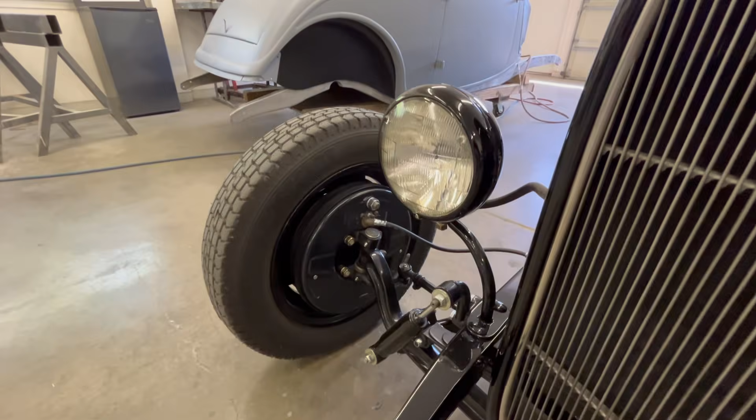And of course the shock absorbers are late model shocks, but the brakes on this car are Lincoln, they're Lincoln Repop by Bowling Brothers. That's front and rear? Yes, all four of them.

You'll notice it's got just a single mount up here, and you have to adjust them at the bottom with the spoon. Remember that? Yeah, you take the rubber out. I got a couple old Volkswagens that use that same method with the little star adjuster, little star wheel in there. Yep, a couple clicks this way, a couple clicks that way, and so she'll stop.

The spindles are 1940.

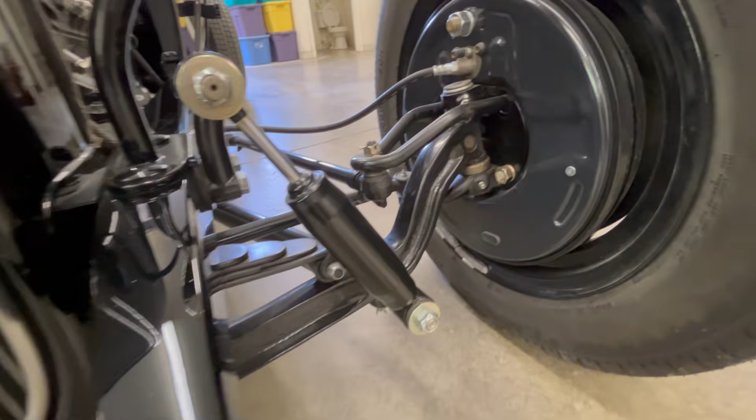The steering arm is an aftermarket steering arm that I dropped. He did drop it a little bit, so the pitman arm is level with the drag link level with the pitman arm down there.

The wishbones are 32, and steering is F1, 1950 Ford pickup.

The engine is a 1947 Ford. That might be 48, I had a 47 block, but I don't think that was good, so that might be a 48 block. Doesn't matter, same thing. All built by Archie Summers.

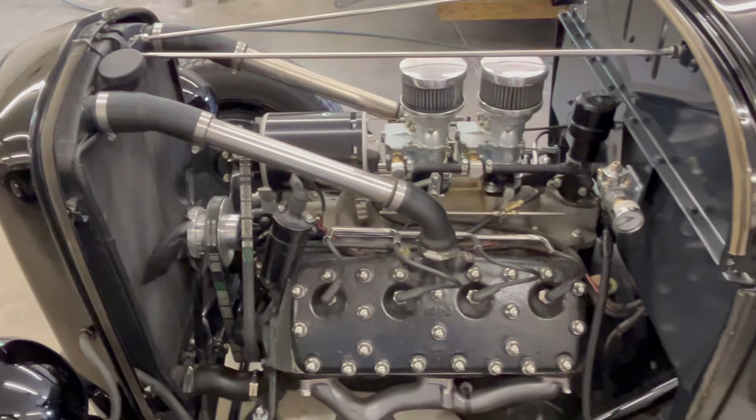And it's not a real generator, there's an alternator inside the generator.

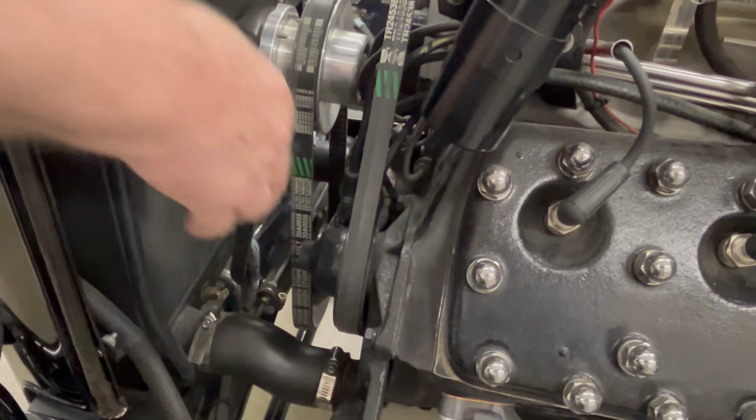Ignition, the distributor is a 42 Ford, that's the short one for clearance in here, you got to have the short one. So that's what that is. Yep, pretty tight squeeze in there. Yeah, it gets pretty close.

The radiator is from Brass Works down in Paso Robles.

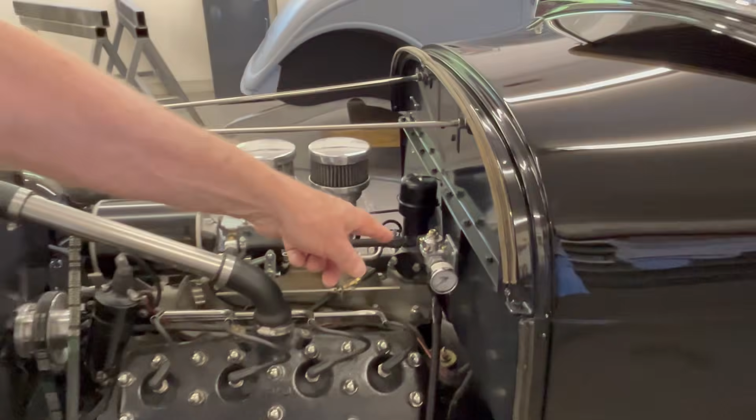And that's a warmed up flathead, Don? Yeah, it's about 130 horse, 85 horse stock, you know. It's beautiful, got dual carbs, dual 97s on it with an offie manifold, and your fuel pressure regulator right there. That runs at about 2.5 pounds of pressure, you see that when it's running, it's about 2.5 pounds, which is right for that.

Beautiful, and this is that traditional look in the engine bay. It's not red, it's not a finned head, polished. There's a lot of different styles that people use when they do a traditional hot rod build.

Right, sometimes it's a lot of eyeball with a partial hood. This really reminds me of kind of a high schooler that's on a budget, building a car in his folks' garage or driveway. The whole theme of this car was to build one like a guy who just got out of the service, Second World War, on a limited budget.

Yep, in like 1949. You could buy a frame for $5 and a body for $10, and all that. So that was the theme of the car: authentic, early California hot rod.

Now the cowl, I found it doesn't matter where, but I found this cowl is absolutely mint. It was mint, and it came with the windshield post and windshield frame. I've laid the windshield back and all that stuff, but the cowl was just primo deluxe, no rust, nothing like that. Wow, that's a nice find.

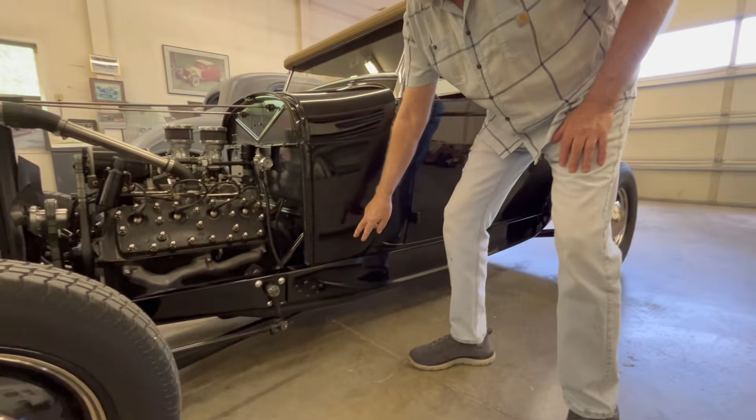And the frame is slightly pinched in this area here because they tend to be a little bit too wide, so it's pinched a bit to fit the body. And that's to accommodate the shape of the 29 body that gets installed in a 32 frame.

And is the frame reinforced? Yeah, I want to show you that. I have a thing I'm going to give you and show you where I reinforce it. I have a schematic of a 32 frame, and I drew in there with a magic marker what I did, so you'll know when you're under there, you can see it.

And the hot rod for dummies pitch I gave you is actually partially true. Is this a chopped and channeled? No, not chopped and channeled, it's chopped a little bit, the windshield. If I remember right, the windshield's down about 2.5 inches or so, I don't remember exactly.

It's not channeled because the body's sitting on top of the frame. And if it was channeled, you'd see the frame rail tucked, the body would be over the frame. That's a completely different look. Now, you don't want to do that on a 32 frame because the frames are like 6 inches tall. If you channel it, you don't have any room inside.

So this way you get maximum room inside, which once you get in there, you'll appreciate. It's a little on the tight side getting in and out. And Don, what about the trunk? Can we pop the trunk?

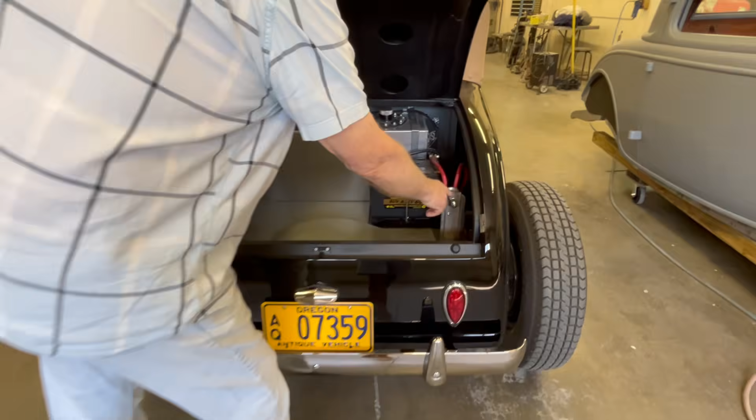I know you've got a battery cutoff in the trunk. Battery cutoff's right here, it's off right now. So that leaves power to, left position's off, right position's on. And there's an aftermarket fuel tank.

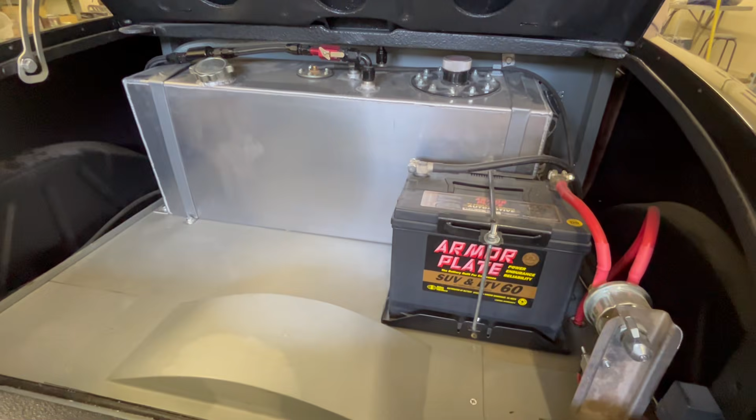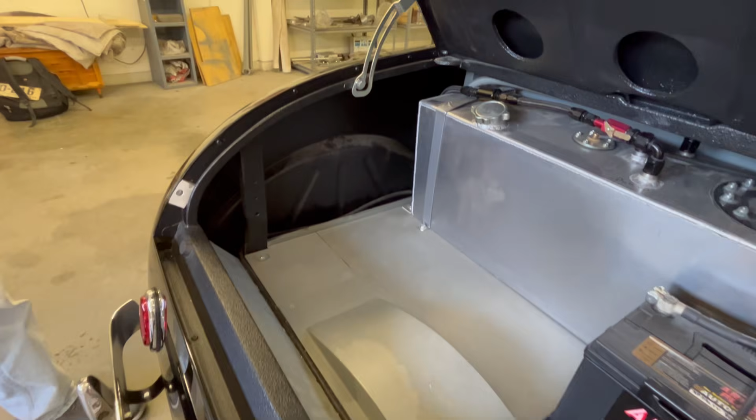It just looks so clean, and every detail is usual stuff. I didn't finish it all off with carpet or anything like that, because they wouldn't have done that back then, sticking to that theme of 1949, 1950. I mean, I could have taken it all the way, had all the upholstery, but what for? They didn't do it back then, guys did not have a whole lot of money, and the only reason they build a good car is because you buy stuff so cheap.

Now the taillights are 39 Ford, they're LEDs. And the bumper is... why can I remember that... not a Morris Minor, but the other little car, you could buy it out of Sears Roebuck. It's true, really.

Yeah, they sold them in Sears Roebuck catalogs. So I'm picturing kind of a micro car or a mini. It was a small car, I can never remember the name of it. Anyway, that's the front bumper off of one.

Oh okay, it's been re-chromed. Yeah, it required a lot of work. It was not a good thing, but I mounted that back there and all that. Oh, the body and paint is just beautiful.

Now the passenger cell has been moved 2 inches to the rear. This part right here used to be 2 inches forward. I shortened up this upper deck panel, moved this back, so you got more room. So this back was 2 inches more forward originally. By virtue of moving it this way 2 inches, now your seat and interior cabin space has gotten a little bit more spacious. That's the passenger cell, and it's got more room now.

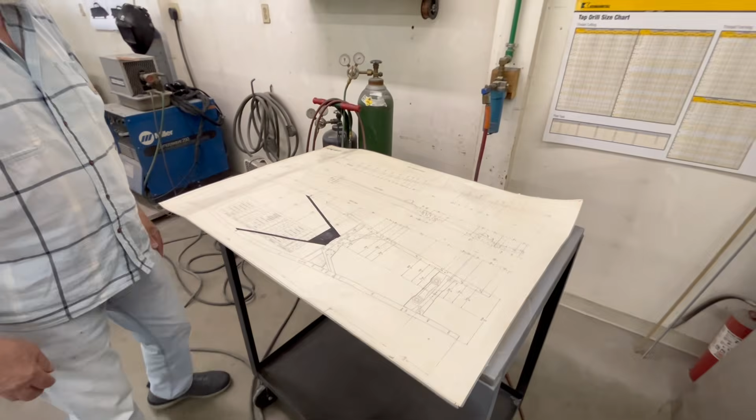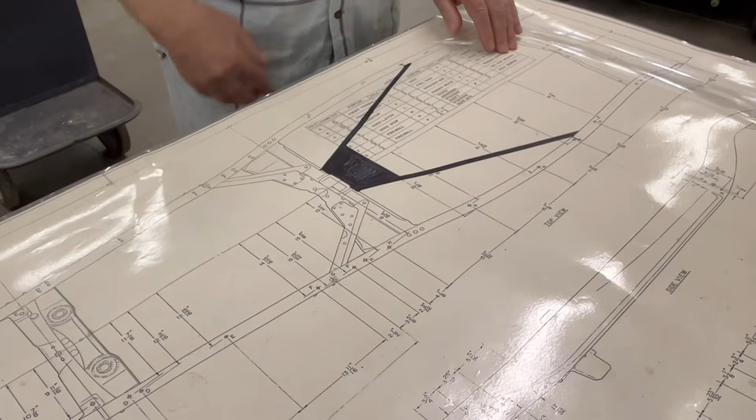Let me show you the frame thing on the schematic I have. '32, the frame that sits underneath that car, with a Model A front cross member and a Model A rear cross member. But the K member is original '32, but it's been narrowed a little bit because they had to pinch the frame rails to follow the '29 body a little bit. That's the pinch we talked about when we were filming the car.

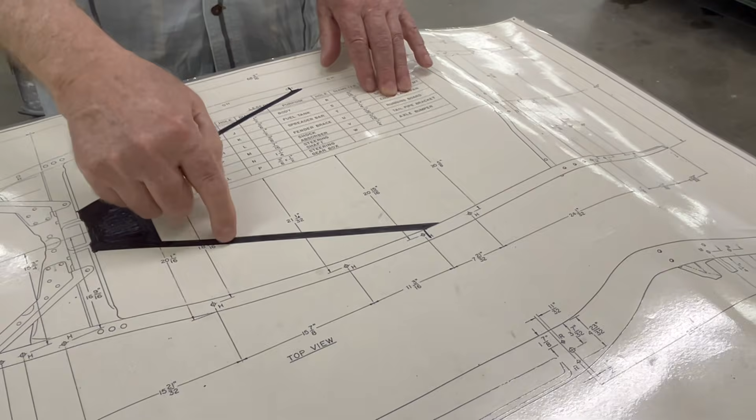The black part here is what I added to it because these things flex a lot, okay? So these right here are a 2x5, 3-sided channel out of a '47 Ford, and it's got the holes in it for the exhaust to run through and all that stuff. So I used those, then I welded them to the back of the K member down into the frame rail back here. And then I added this heavy quarter-inch plate up in here, across this area, just bolted in.

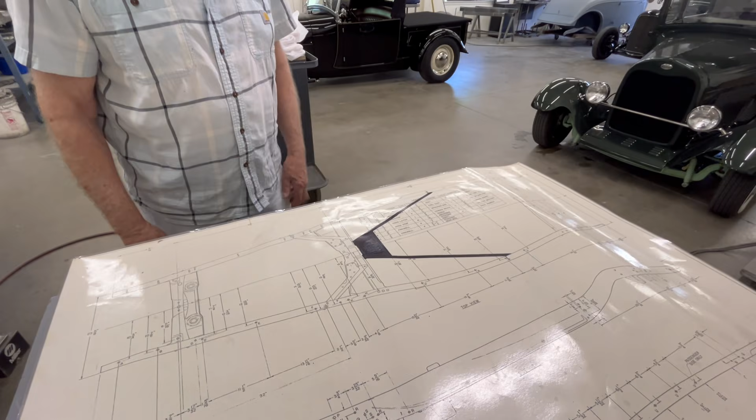That's to keep everything from flexing, to minimize the flex, okay? And you'll see, when you get under there, you'll see that. So I drew that in for you so you would know what that was all about. So that's how you properly put the right frame together, solid, well thought through.

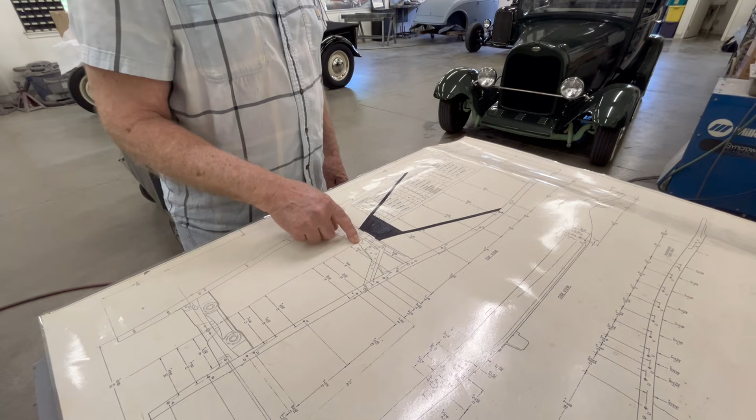Old-timey, okay? Now what they do today with the repop frames is they've got all this tubular stuff going on, all tubular cross members, side to side and this and that, set up for Chevrolet motors and stuff like that. If you're gonna run a flathead, you gotta run the original K member, because the transmission - you could see the K member, it's like this high with a hole.

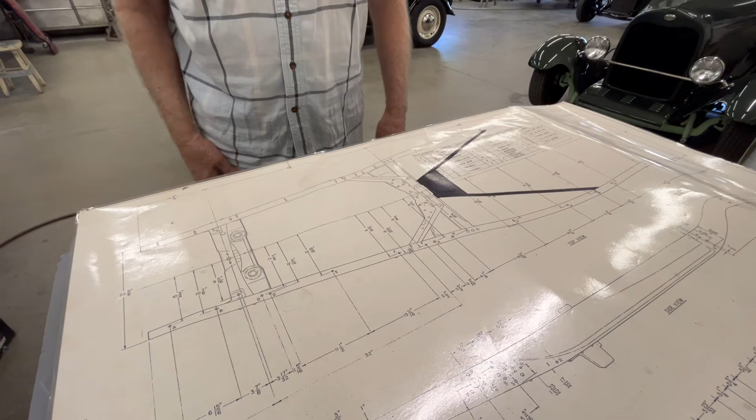The transmission goes through there, mounts in here, and sticks out the back and connects to the torque tube. So that's an enclosed drivetrain, enclosed with a drive shaft inside the torque tube, you know, like old Ford. And like I say, these sections here were about a 2x5 or so, with the flared holes for the exhaust to run through. You'll see all that when you get in there.

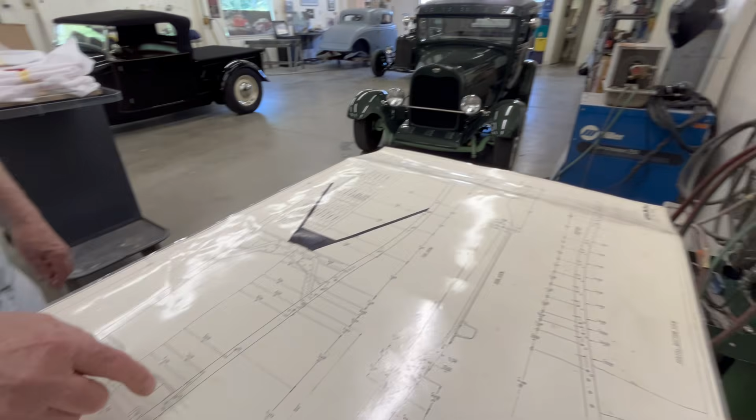Motor mounts are handmade. I made those up. There you have it, that's about the extent of the frame situation.

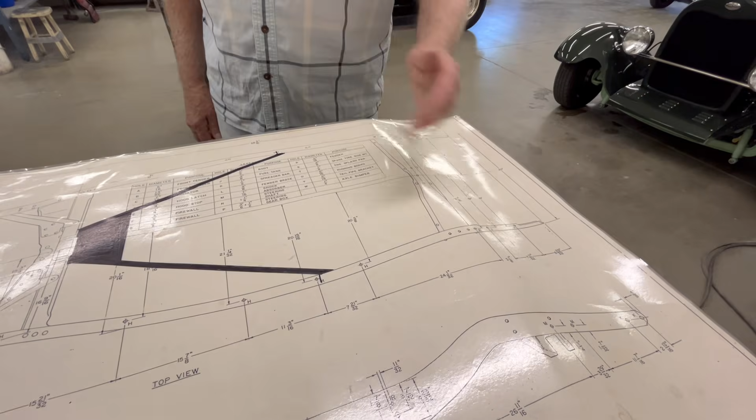Of course, the frame horns are cut off. The rear frame horns are cut off, right about in here somewhere, and you don't need those. The body only comes to here, that's where the body ends. Yeah, the '32s had the gas tank off the back, remember? The gas tank hangs out here, so they had the long horns on. So you trim it to fit.

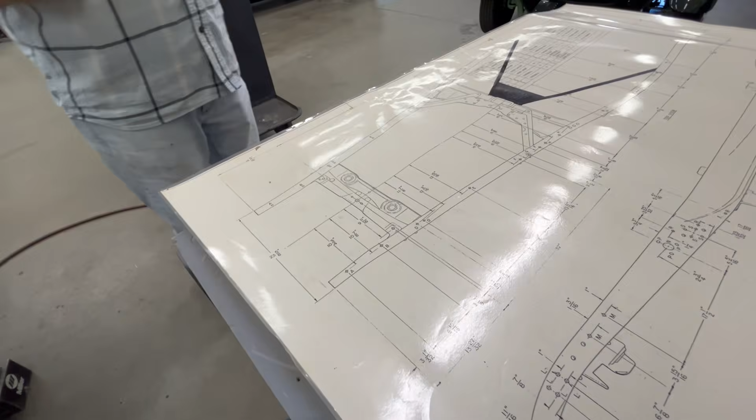Yeah, exactly. I left the front - I didn't cut the front frame horns, I left those on there. Like I said, I just did what was typical hot rod build after the war. And that's it, a good street driver, you know. That's what that was all about.

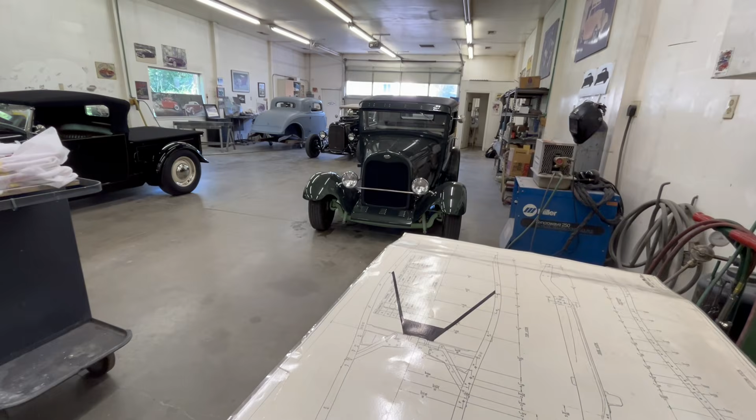I think it was 2.5, maybe 3, something like that. It doesn't matter. It's got a look to it, that's what matters. Oh, it looks cool, it's got the look. Everything in the shop, Don, has the look. It's got the look, man. Everywhere I film, cool stuff, I see the look.